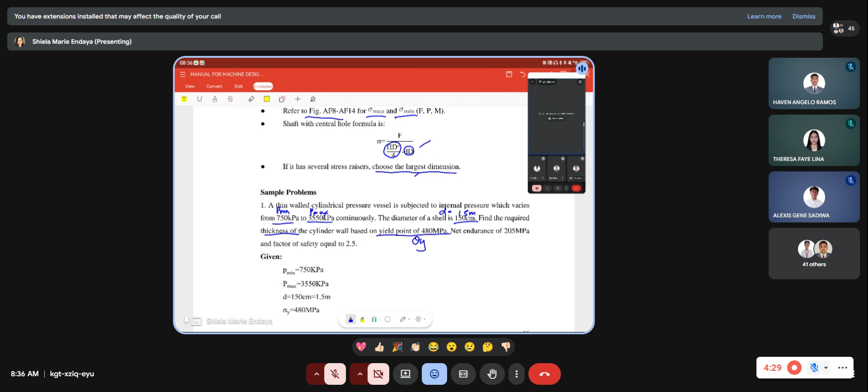So ibig sabihin, ito yung ating stress Y, 480 MPa. And the net endurance of 205, so endurance strength, ito yung ating stress N. And factor of safety equal to 2.5. So yan po yung mga given natin.

Ano, audible pa po? Okay so yan, ang atin ngayong required is yung find thickness. So ang atin ngayong solution, simulan muna natin dun sa equation ng Soderberg's, di ba?

Since ito naman po ay thin-walled pressure vessel, ang i-apply natin sa pagkuha ng stress ay PD over 2T. So yung formula nga natin ng Soderberg's is stress M over stress Y plus stress A over stress N equals sa 1 over Fs. Itong stress Y, okay na tayo. Ito namang stress N, kukunin pa natin.

May given ba? May given na pala. Tapos ito naman na stress M at stress A na lang. Ang stress M o mean stress ay equals to stress max plus stress min over 2. Pero paano natin ngayon kukunin to?

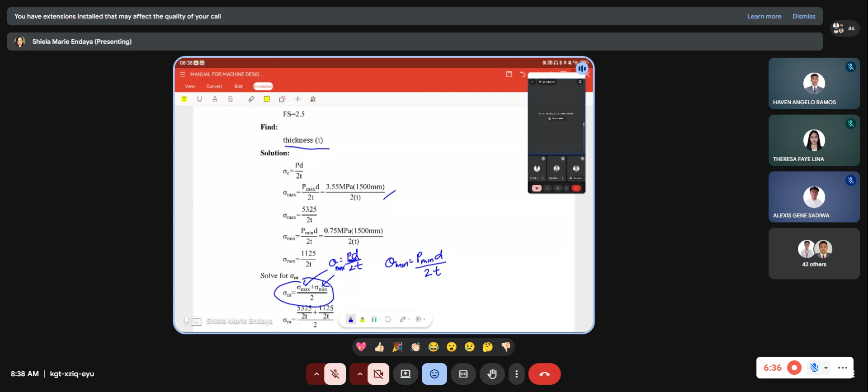So from the ating formula na PD over 2T. Kung max, edi P max ang gagamitin natin, so kaya kung ito yung max, P max over 2T. Kung naman min, edi P min D over 2T. Kaya po tayo nagkaroon nito. So yung P max is 3.55 MPa times the diameter of the shell which is 1.5 meter or 1,500 millimeter, kaya we have this.

May equate pa natin yung ating stress max in terms of thickness kasi wala tayong given na thickness, ito nga yung hinahanap. So yung stress min, same din, 0.75 since ito yung P min times 1,500 over 2T. So yan, we have this 1125 over 2T.

Substitute natin dito: 5,325 over 2T plus 1,125 over 2T, over 2. Parinig pa ako, may naiingay eh. Okay, simplifying this, sasamahan to, magiging all over 4T. Tapos pag-plusin lang natin itong 5,325 and 1,125.

Kaya ito ay 10,145... ay, 6 pala, 6. Okay, kaya 6,450 yung ating sagot dito, 4T pa lang yan in terms pa lang ng T. Okay, sige.

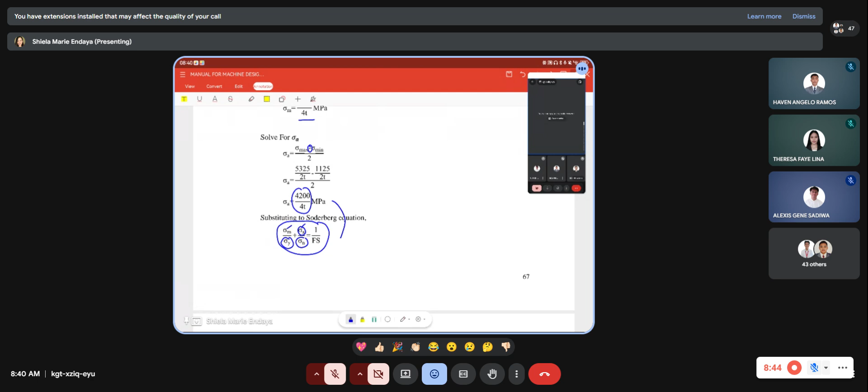So next, we need to find yung stress A naman o yung alternating stress which is stress max minus stress mean over 2. Pinagkaiba lang nga nito sa average stress ay nag-minus na tayo. So dito naman we have 4,200 over 4T. Then substituting yung ating na-solve na equation, from Soderberg's equation, so we have itong 6,450 over 4T.

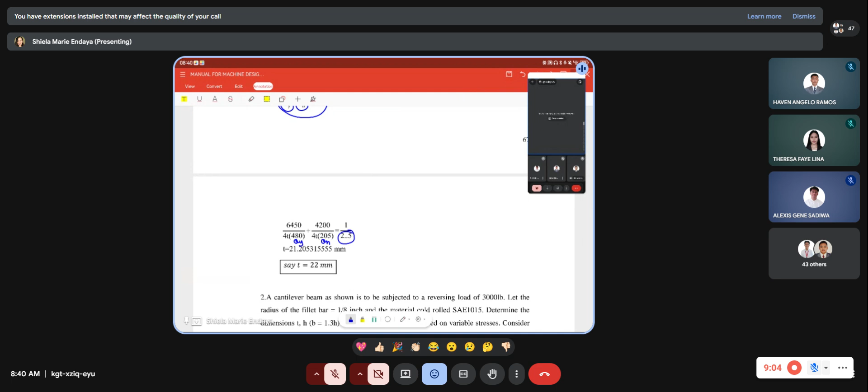Ito nga yung stress Y, ito ang stress N, so factor of safety, 2.5 nga ba ang factor of safety? 2.5. Okay, so now we have 21.20 millimeter, o sabihin nating 22 millimeter ang thickness. Okay po, nakuha?

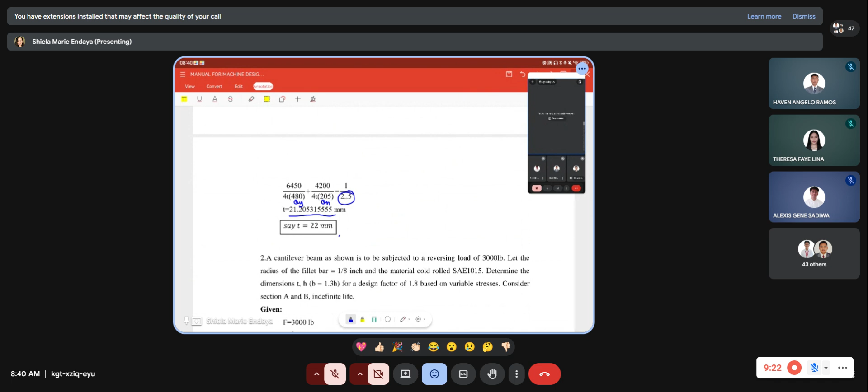So next, a cantilever beam is shown to be subjected to a reversing load of 3,000 pounds. Let the radius of the fillet, ito yung R, is 1 over 8 inch and the material is cold roll SAE 1015. Determine the thickness, the height H and B, which is B equals 1.3H for a design factor of 1.8 based on variable stress.

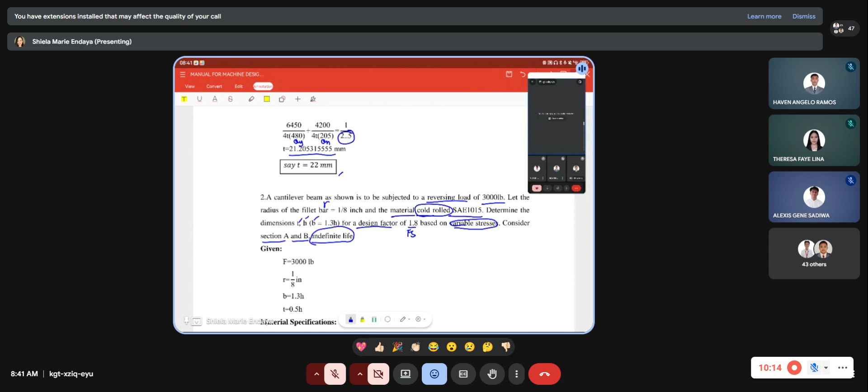Ang gagamitin natin dito na mga formula is the variable stress analysis. So consider section A and B indefinite life. Okay, so ito po yung mga given natin. Dito, material specification SAE 1015 cold roll. Una muna nga natin, hanapin natin yung mga stress U, stress Y, and BHN.

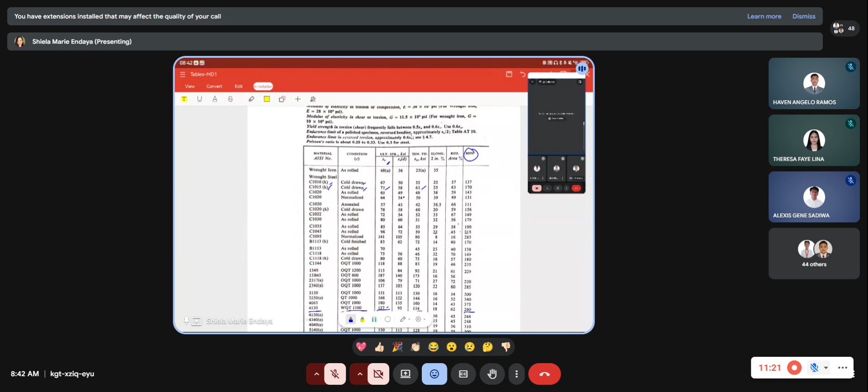BHN, ano nga yun? SAE. Ano ang tinatanong? 1015 cold roll. So mali ang aking ito pala. So ang SU is 77, ang SY is 63, and BHN of 170. Ayan, so kaya tayo meron ganitong value, okay? Then the factor of safety of 1.8.

So solution, based sa problem, it is a reverse loading. So ang i-apply natin na formula ay kapag reverse, ang mean stress is 0 and then ang alternating stress is equal to stress max.

Oh, yan, nagkaklase ako. Ano ba yan? Kasi nag-aabot kami sa klase.

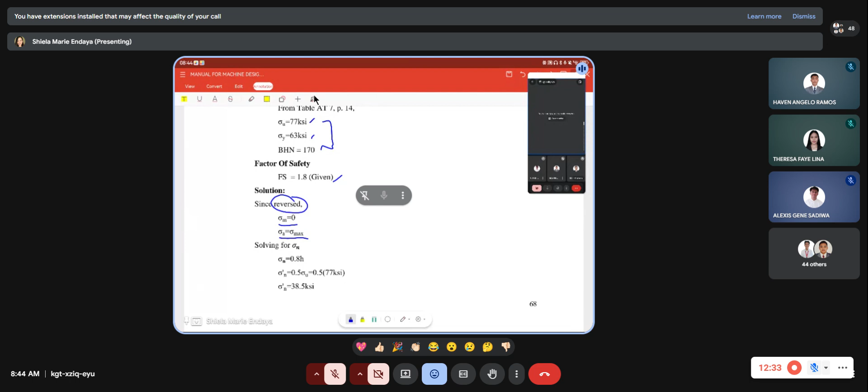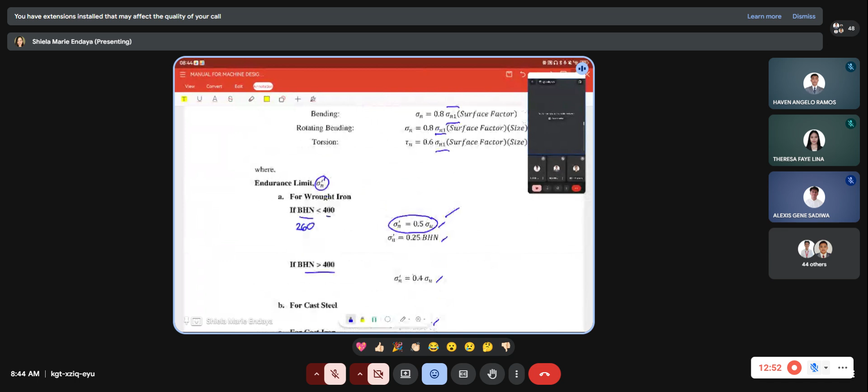Since ang ating BHN is less than... nasa na? Yung less than 400, this one. So since less than 400, then ang ating stress prime N is equal to 0.5 stress U. So ang i-apply din natin dito is for indefinite life basis, that's why ang gagamitin natin ay 0.8.

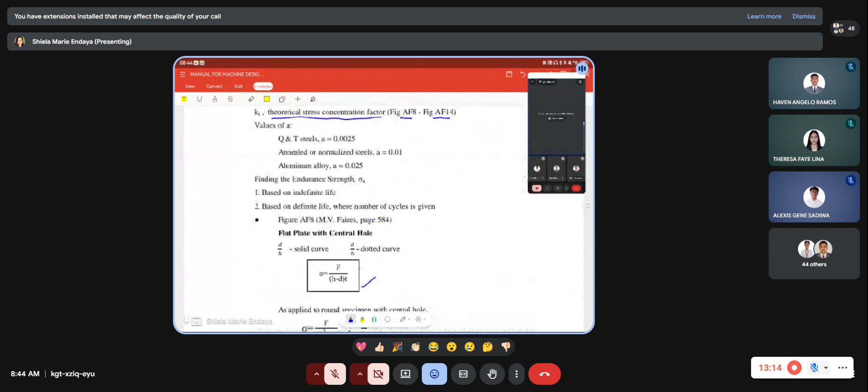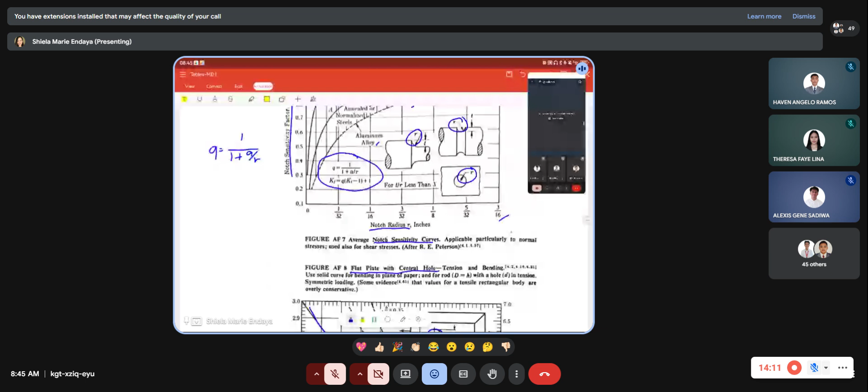So we have 38.5. Then for surface factor, gagamitin natin ngayon ay itong nasa atin na para nga sa surface factor. Ayan, so yung figure kasi natin ay ito na, ito. Ito dito. Okay, so yung...

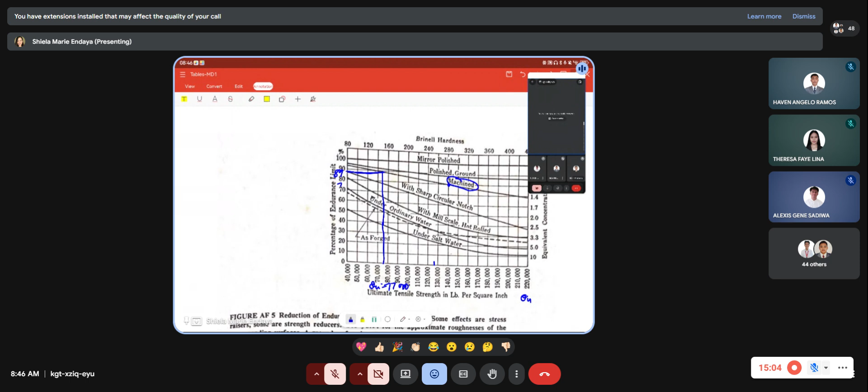Yung ating nakuha na ultimate stress which is 77. So taas lang natin ito to machine. So we have 89, nasusundan po? O, di ba, nakuha nating stress U is 77 KSI o 77,000 PSI. So tinaasan natin, since hindi stated sa problem, so i-assume natin na machine. That's why pre-project natin siya papunta din sa machine. Then to the left, so 89%. So kaya po tayo dito nagkameron ng 0.89, so pag kinumpute natin to, we had 27.412 KSI.

So next, consider fillet. So sa fillet, we have ang stress A natin is MC over I, kasi magkakameron tayo dito ng bending, where C is H over 2, and then ang I is BH cube over 12.

So computing the maximum moment, ito ay equal sa force times distance or yung length. So dun sa figure natin, nasa na yung sinend ko sa inyo? O, tingnan nyo na lang din yung sinend ko sa inyo. Yung distance papunta sa B ay 22 inch. So kaya dito, 3,000 times 22 equals 66,000 pound inch.

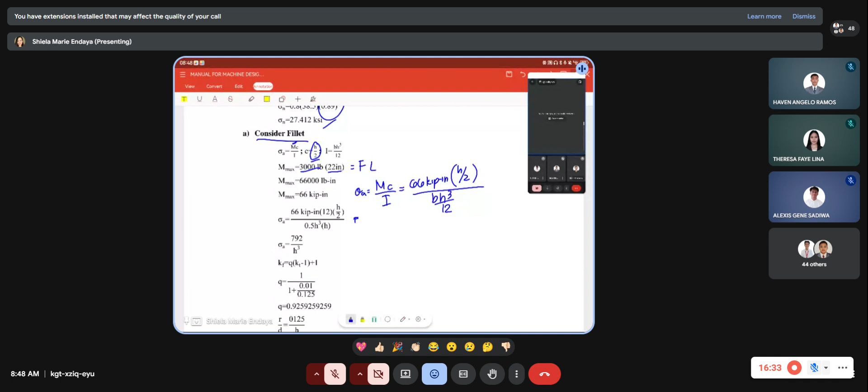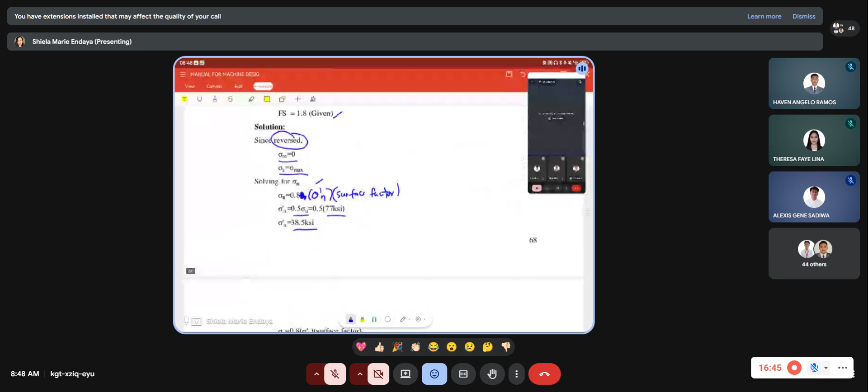So okay na tayo sa M, so ang C nga is H over 2. So kaya pag ginamit natin yung MC over I, so 66 kip inch times H over 2 over BH cube over 12, where yung ating B ay equal nga sa, ano sinabi dito? 1.3H. Pero bakit 0.5 no?

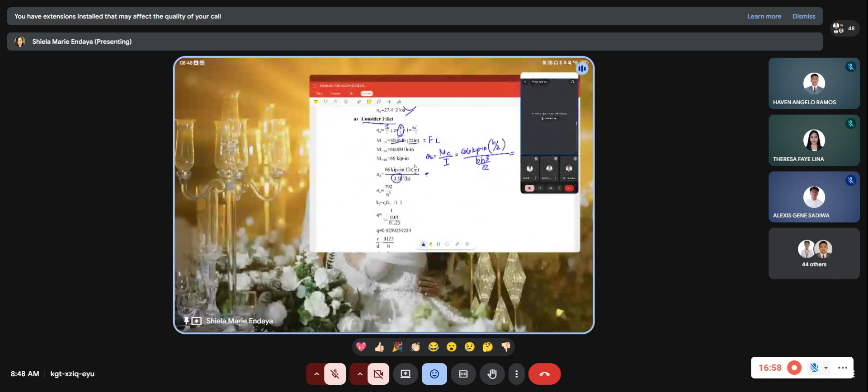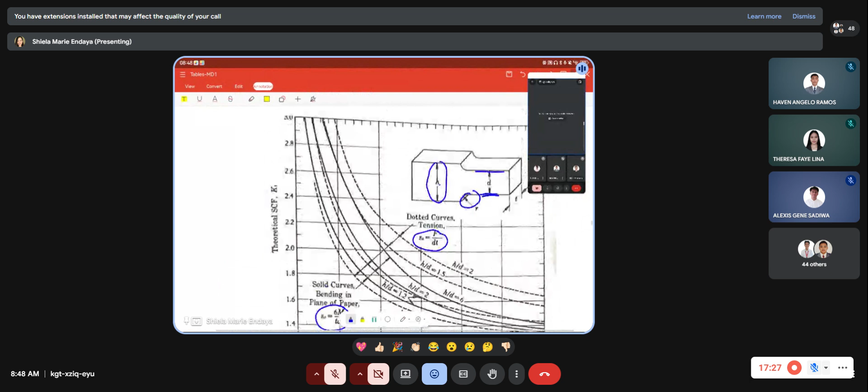Tingnan natin dito. So ano ang sukat dun sa part lang ng fillet, ha? Ano ang sukat ng H? Ano ang B? Tingnan natin, kung rectangular, diba? Ito, BH cube, so ang B natin ay ito, base. So dun sa figure natin, ano ang B? Wait lang.

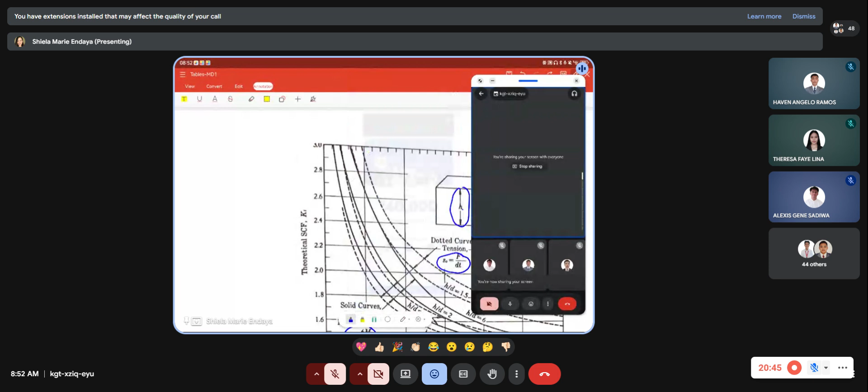Okay, so nakita ko na. Nakikita yung screen ko na ulit. So ito na lang yung gamitin natin, yung 6M over TD squared.

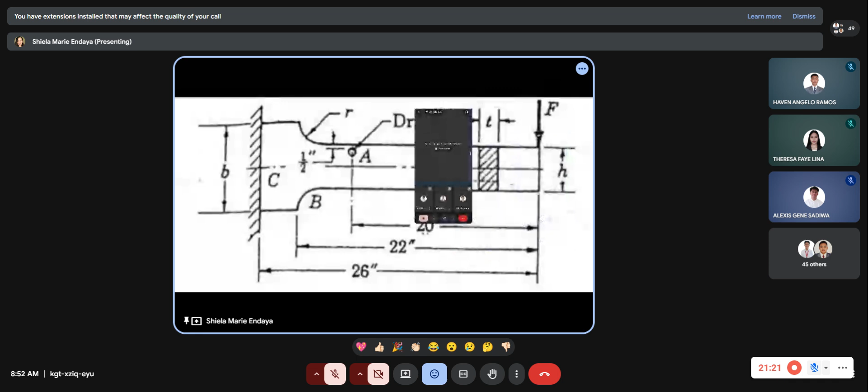So kasi kung i-apply natin itong yung BH cube, iba kasi yung pagkakalagay niya ng dimension. So dito kasi ang ating height dito is nasa left side, tapos dito naman H. Pero pag titingnan natin siya dito sa ating figure AF, so yung B, H dito, yung D, dito ay yung H naman, dun sa atin na problem.

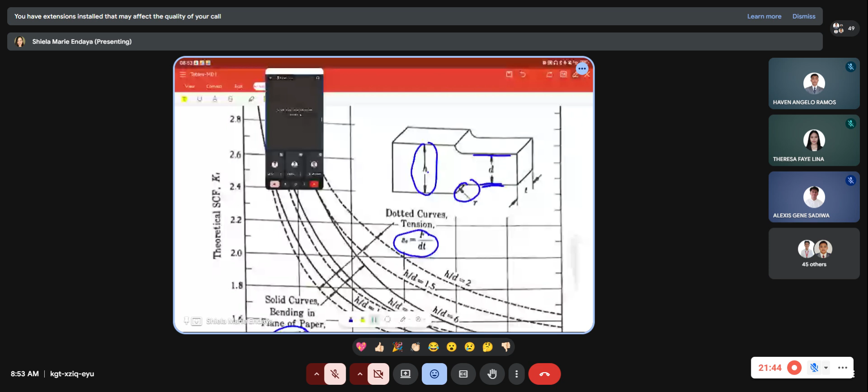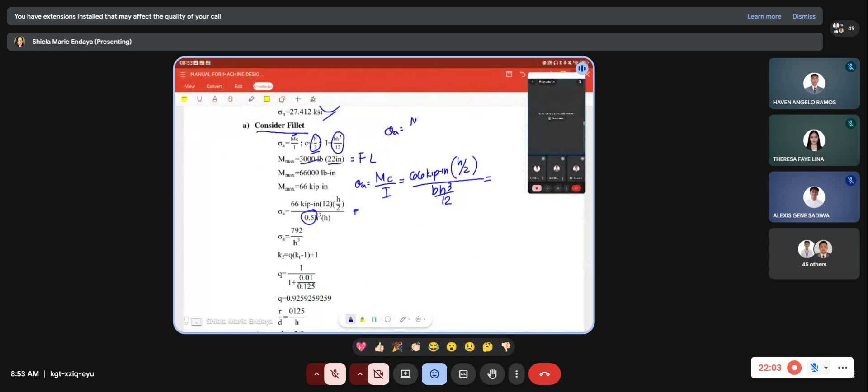So kung i-apply natin itong pagkuha natin ng stress na 6M over TD squared, halos kaparehas natin ito, kasi pag ating ginawa, sinimplify natin, diba, ito na MC over I, so MH over 2 over BH cube over 2 at 12. So diba, ito yung magiging 6M over BH, ano na lang to? BH squared, which is kaparehas nga rin ito natin na nandito na 6M over TD squared.

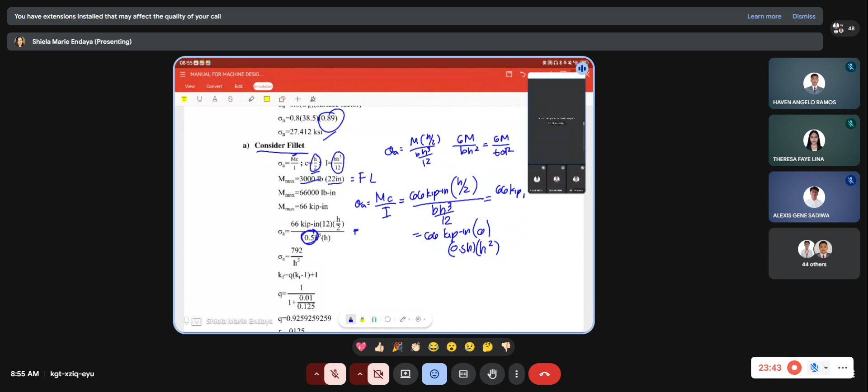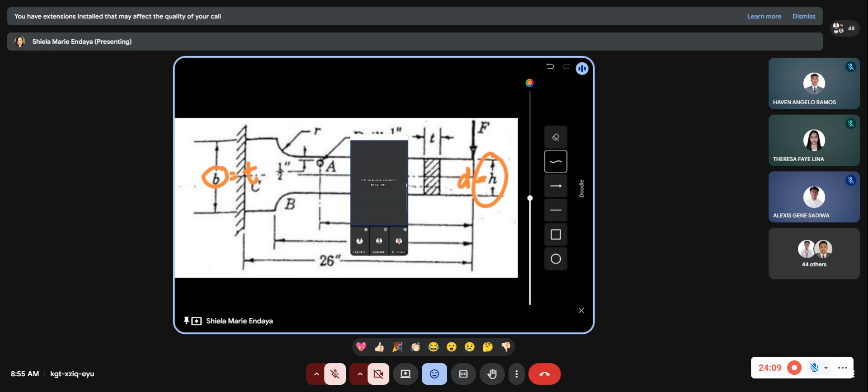Nakuha niyo ba? Kaya dito, 66 kip... ay... kip-in, times yung 6 over yung T natin, which is yung 0.5H, then yung atin na D na equal sa H squared. Yung D dito, diba, siya ay H sa atin, dun sa figure natin dito. Ayan, H. Then, yan, ito yung H, which is, siya yung D, ito namang B, ito yung naging atin na T. Okay? H pala eh.